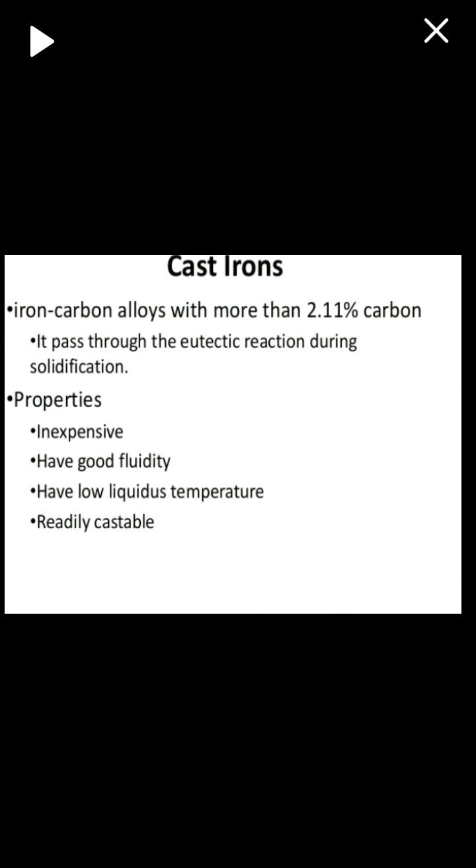The microstructure of cast iron has two extremes. First, liquid austenite plus cementite Fe3C, जिसे white cast iron भी कहते हैं. Second, liquid austenite plus graphite. Graphite formation is promoted by slow cooling, high carbon and silicon content, heavy or thick section size, inoculation particles, presence of S, P, Al, Ni, Sn, Mn, Cu, cobalt, antimony.

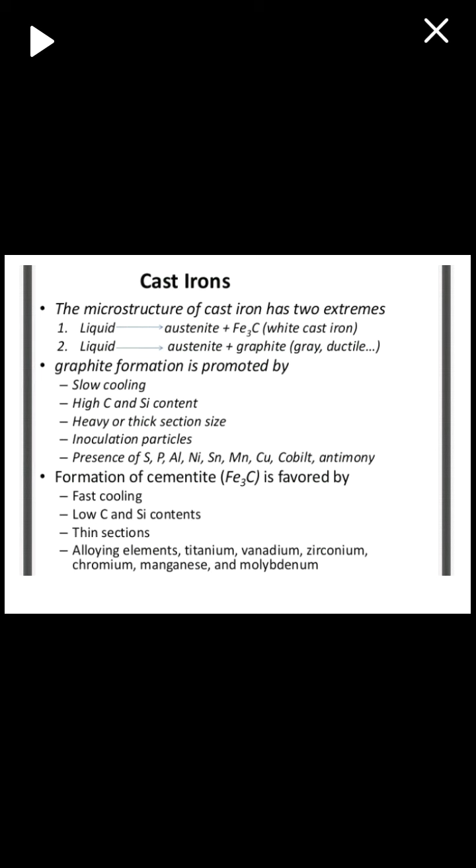Formation of cementite Fe3C is favored by fast cooling, low carbon and silicon content, thin sections, alloying elements titanium, vanadium, zirconium, chromium, manganese and molybdenum. Type of cast iron: depending upon chemical compositions, cooling rate, type and amount of inoculants that are used we can have.

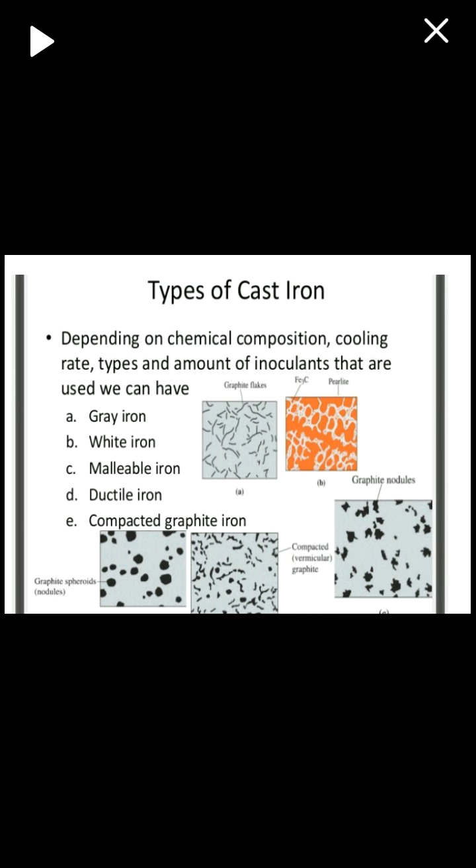Grey cast iron, the least expensive and most common type, characterized by formation of graphite. Typical composition ranges from 2.5 to 4.0% carbon, 1.0 to 3.0% silicon, and 0.4 to 1% manganese. Contains small interconnected graphite flakes that cause low strength and ductility.

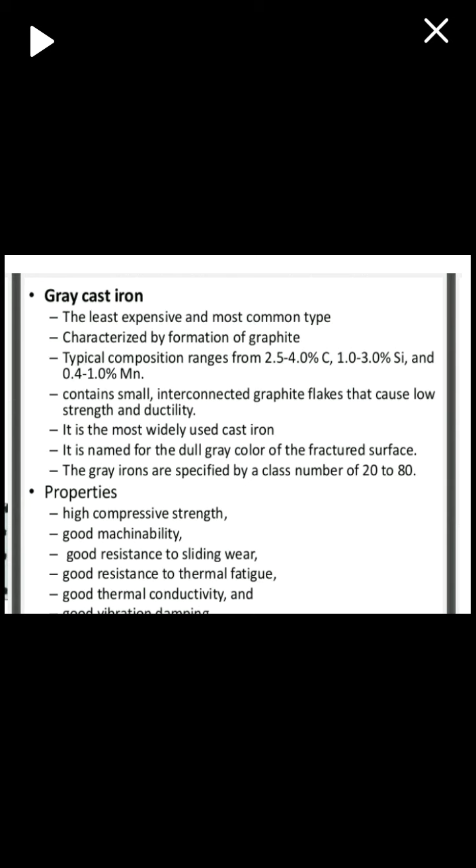It is the most widely used cast iron. It is named for the dull grey color of the fractured surface. Grey cast irons are specified by a class number of 20 to 80. Properties: high compressive strength, good machinability, good resistance to sliding wear, good resistance to thermal fatigue, good thermal conductivity, and good vibration damping.

Grey cast iron applications: damping vibrational energy, base structure for machines and heavy equipment, high resistance to wear, high fluidity at casting temperature, intricate shapes, low casting shrinkage allowance. Strength is not a primary consideration. Tensile strength 120 to 300 megapascal. Used in small cylinder blocks, cylinder heads, pistons, liners, clutch plates, transmission cases, gears, flywheels, water pipes, engine cylinders, brake discs, machinery beds.

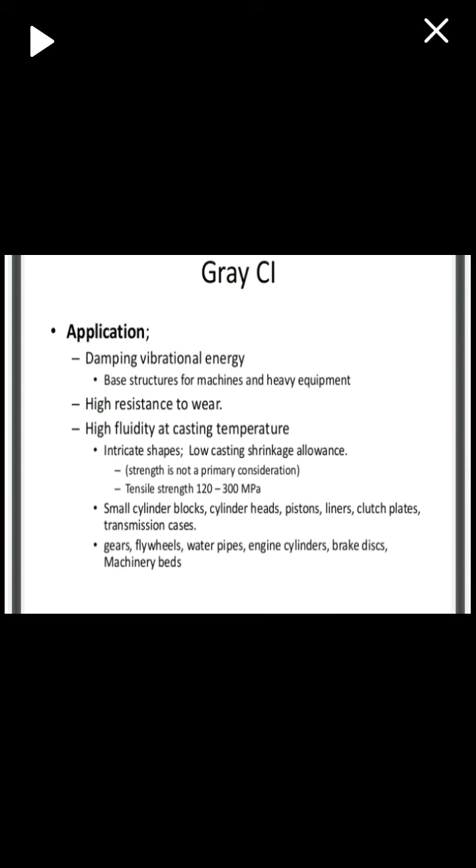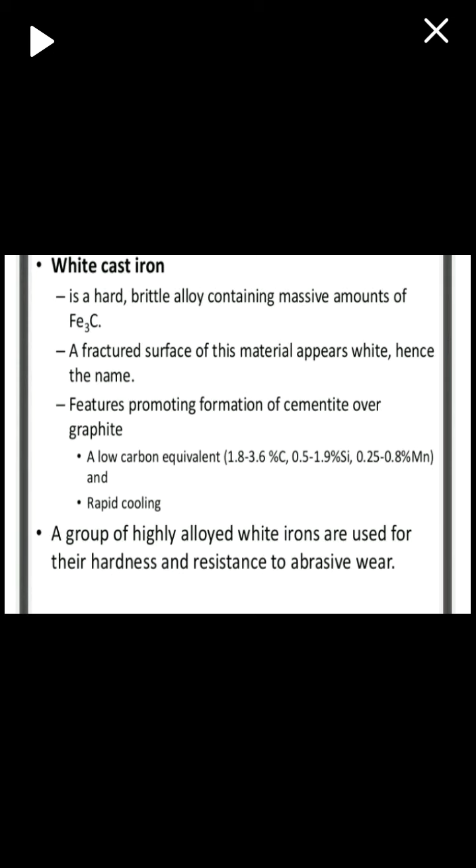Now, white cast iron. White cast iron is a hard, brittle alloy containing a massive amount of cementite. A fractured surface of this material appears white, hence the name white cast iron. Features promoting formation of cementite over graphite: a low carbon equivalent, 1.8 to 3.6% carbon, 0.5 to 1.9% silicon, 0.25 to 0.8% manganese, and rapid cooling. A group of highly alloyed white irons are used for their hardness and resistance to abrasive wear.

Applications: brake shoes, shot blasting nozzles, mill liners, crushers, pump impellers, and other abrasion resistant parts. Wear resistant surfaces, for example rollers in rolling mills. Generally, white iron is used as an intermediary in the production of yet another cast iron, malleable iron. White fractured surface, no graphite because carbon forms cementite or more complex carbides. Abrasion resistant, often alloyed.

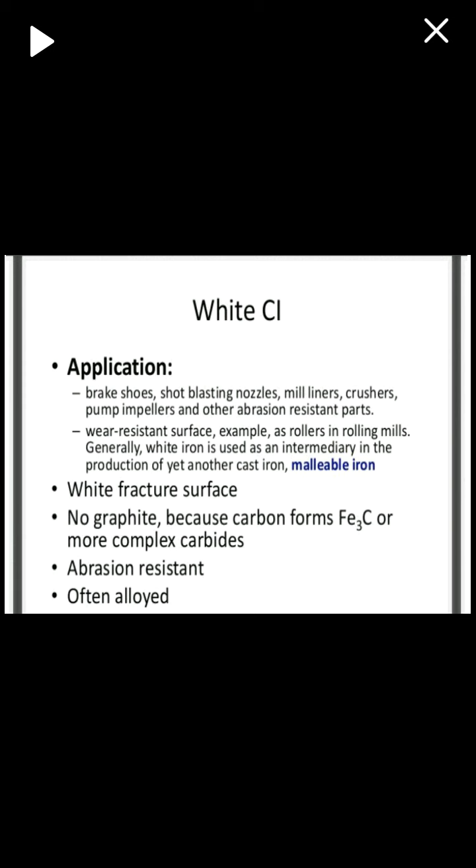Formed by heat treatment in the range of 900 degrees centigrade of unalloyed 3% carbon white cast iron. Carbon equivalent 2.5% carbon, 1.5% silicon. The cementite dissociates into its component elements such as graphite clumps or nodules. It exhibits better ductility than grey or white cast iron. It is also very machinable.

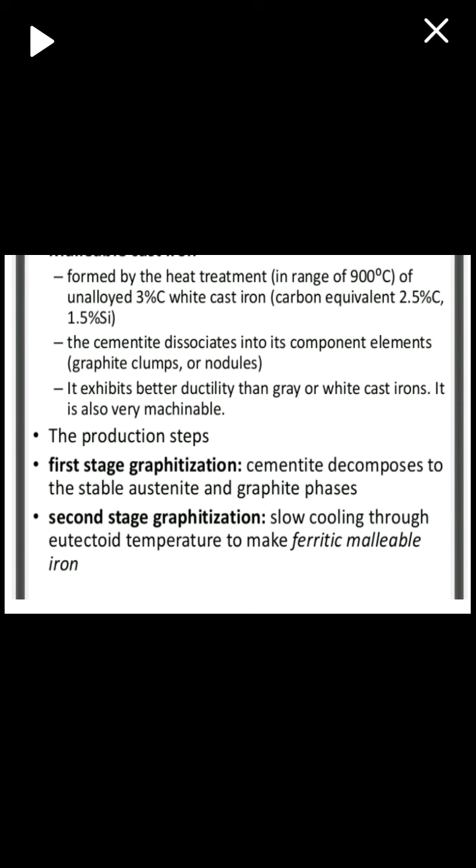The production steps: first stage graphitization, cementite decomposition to the stable austenite and graphite phases. Second stage graphitization, slow cooling through the eutectoid temperature to make ferritic malleable iron. When austenite is cooled in air or oil, pearlitic malleable iron is obtained. Pearlite or martensite. Drawing. Drawing is a heat treatment that tempers the martensite or spheroidizes the pearlite.

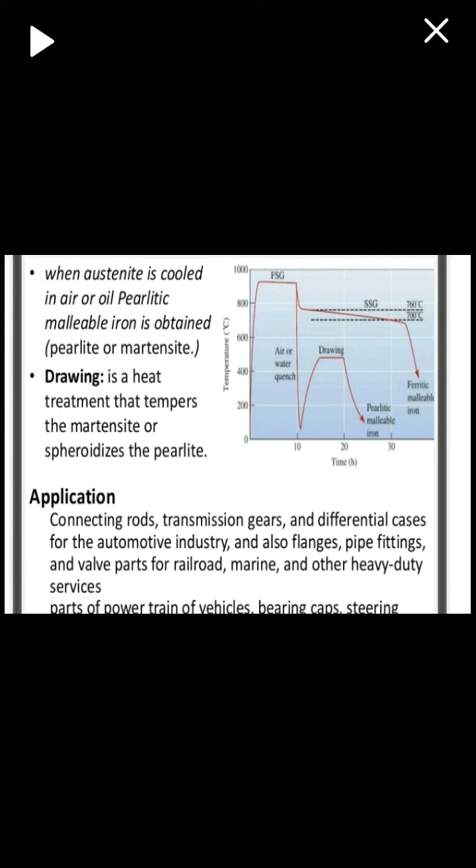Applications: connecting rods, transmission gears, differential cases for the automotive industry, flanges, pipe fittings, valve parts for railroad, marine, and other heavy duty services. Parts of powertrains of vehicles, bearing caps, steering.

Ductile or nodular cast iron contains spheroidal graphite particles produced by treating liquid iron with a carbon equivalent of near 4.3% with magnesium. Steps: desulfurization. Calcium oxide is used to remove sulfur and oxygen from the liquid. Nodulization.

Magnesium in dilute form, MgFeSi alloy, magnesium ferrosilicon alloy, is added. A residual of 0.03% magnesium must be present after treatment in order for spheroidal graphite to grow.

Then inoculation. Heterogeneous nucleation of the graphite is essential. Fading. Fading occurs by the gradual, non-violent loss of magnesium due to vaporization and reaction with oxygen.

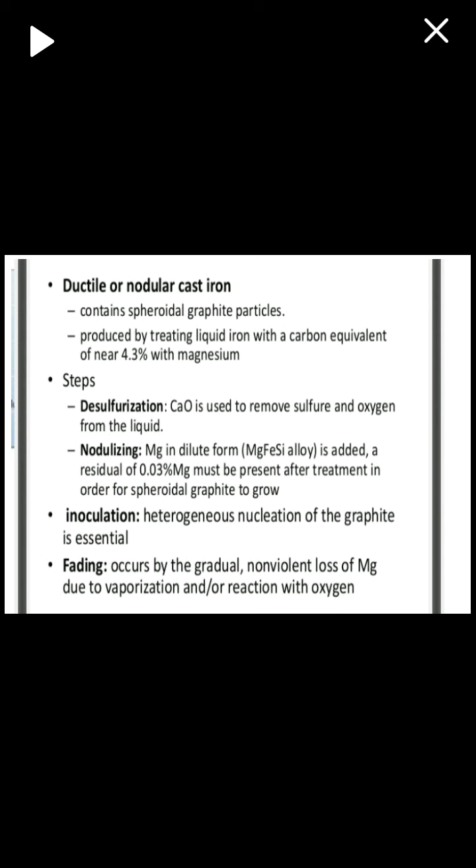Ductile or nodular cast iron applications: valves, pump bodies, crankshafts, high strength gears, heavy duty gears, and machines, rollers, slides, die material having high strength and high ductility.

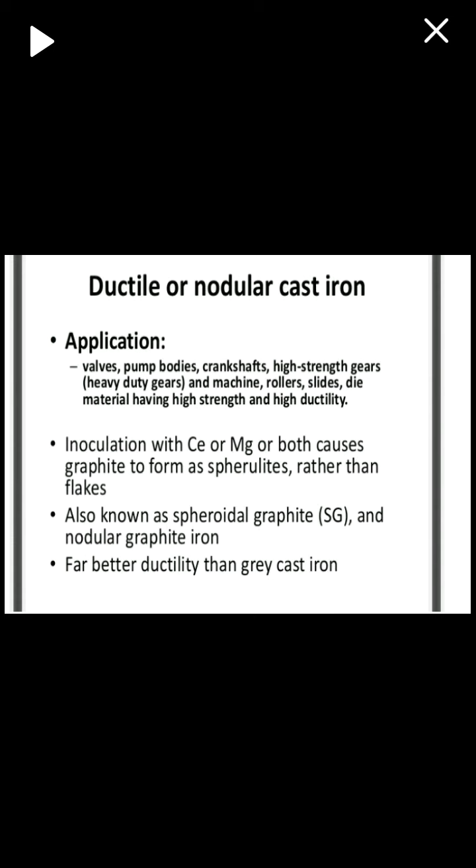Inoculation with Ce or Mg or both causes graphite to form as spherulites rather than flakes, also known as spheroidal graphite SG and nodular graphite iron, far more ductile than grey cast iron.

Less hard and brittle, very weak in tension due to the pointed and sharp end of graphite flakes where the failure of the component is initiated at this point. Good during compression, where graphite acts as a cushion or sponge that could absorb the compression energy. Low shrinkage in mold due to formation of graphite flakes. Good dry bearing qualities due to graphite.

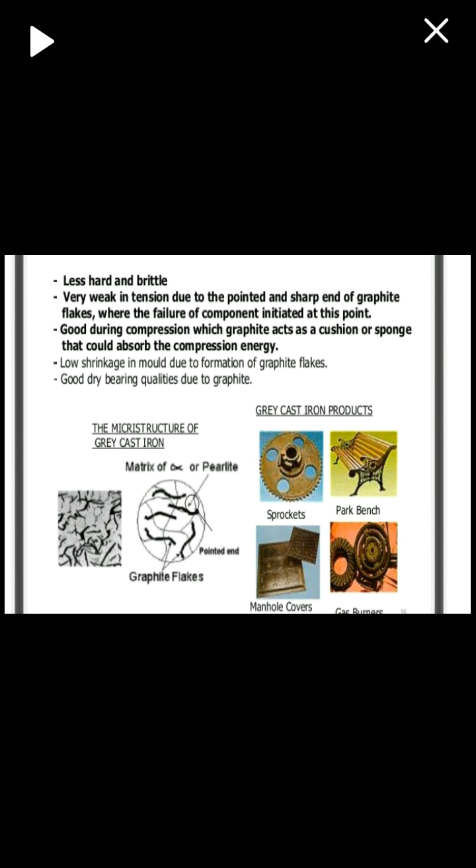White cast iron summary. The composition of carbon and silicon content for white cast iron are in range between 2.5 to 4% and less than 1.0% respectively. With a rapid cooling rate, most of the carbon in the cast iron consists of pearlite and cementite.

The mechanical characteristics of white cast iron are as follows: relatively very hard, brittle, and not weldable compared to grey cast iron. Since it is obtained from a rapid cooling process, when it is annealed, it becomes malleable cast iron. A fractured surface of these alloys has a white appearance and it is called white cast iron. Typical uses: necessities a very hard and wear resistant surface such as rollers in rolling mills, railroad wheels.

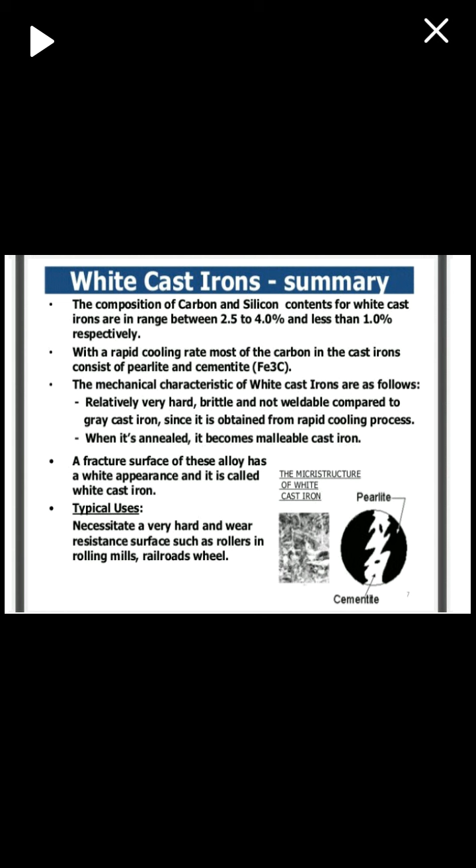Ductile nodular cast iron summary. Ductile cast iron, which is sometimes called nodular or spheroidal graphite cast iron, gets this name because its carbon is in the shape of small spheres, not flakes. Magnesium or cerium is added to the iron before casting occurs. The effect of these materials is to prevent the formation of graphite flakes during the slow cooling of iron.

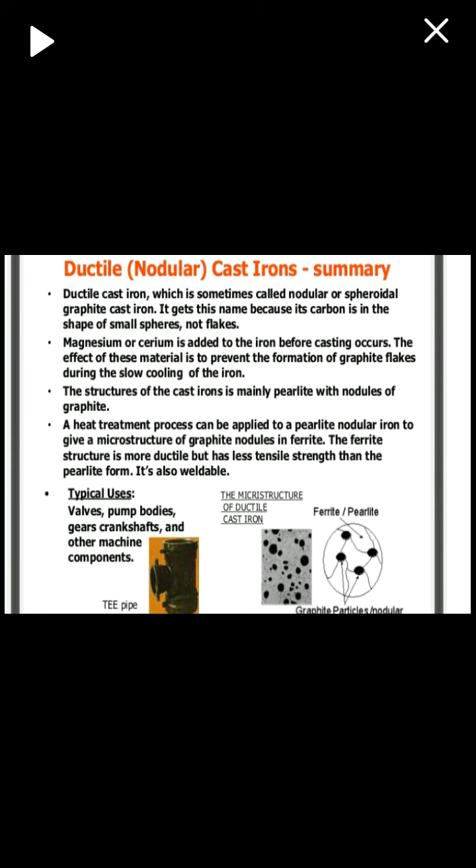The structure of the cast iron is mainly pearlite with nodules of graphite. A heat treatment process can be applied to a pearlite nodular iron to give a microstructure of graphite nodules in ferrite. The ferrite structure is more ductile but has less tensile strength than the pearlite form. It's also weldable. Uses: valves, pump bodies, gears, crankshafts, and other machine components.

Malleable cast iron summary. Malleable cast iron is produced by the heat treatment of white cast iron. Heating white iron at a temperature of 800 to 900 centigrade for 50 hours in a neutral atmosphere to prevent oxidation causes a decomposition of the cementite, forming graphite in the form of clusters, rosettes, surrounded by a ferrite or pearlite matrix, depending on cooling rate.

The mechanical characteristics of malleable cast iron are similar to nodular cast iron and give high strength and more ductility and malleability. The silicon content is low.

Effect of alloying elements. General characteristics of white cast iron. White cast iron contains chromium to prevent formation of graphite upon solidification and to ensure stability of the carbide phase. Usually nickel, molybdenum, and copper are alloyed to prevent the formation of pearlite when a matrix of martensite is desired. They fall into three major groups.

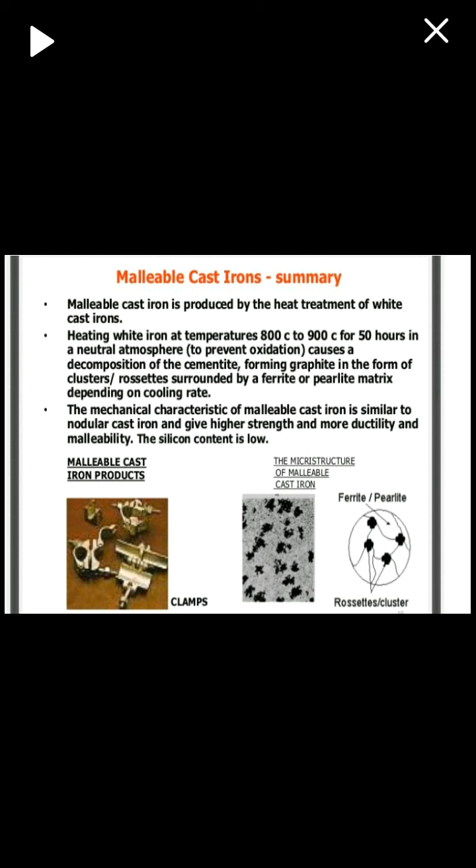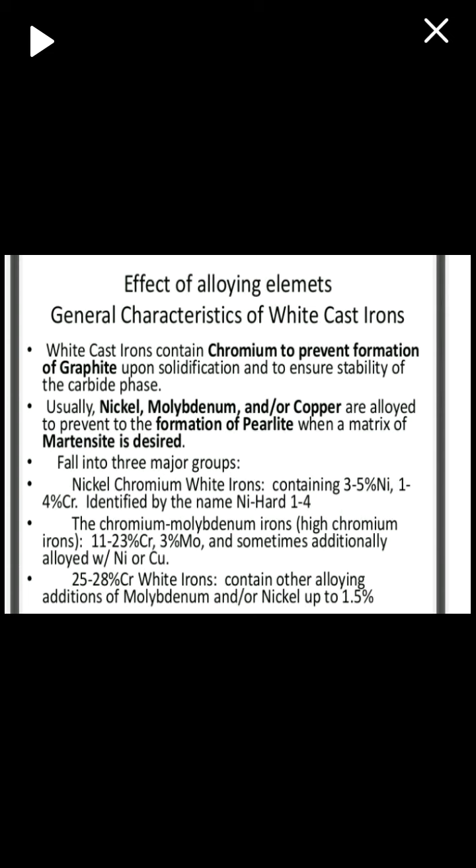First, nickel chromium white cast iron containing 3 to 5% nickel, 1 to 4% chromium, identified by the name Ni-Hard 1 to 4. Second, the chromium molybdenum irons, high chromium irons, 11 to 23% chromium, 3% molybdenum, and sometimes additionally alloyed with nickel or copper. Third, 25 to 28% chromium white cast iron contains other alloying additions of molybdenum and nickel up to 1.5%.